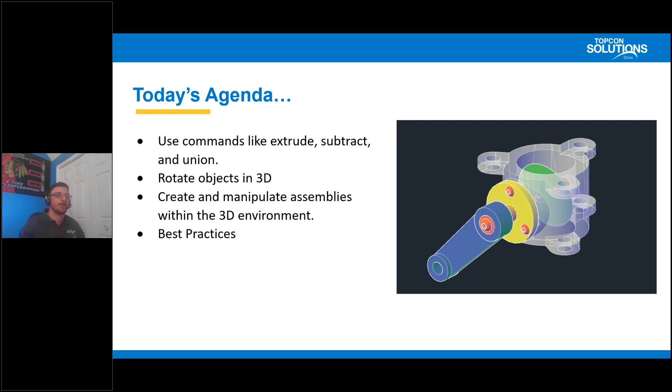With that being said, I'm going to go ahead and fire up AutoCAD 2022. You should be able to do all this stuff that I'm doing in 2020, 2021, even as far back as 2016 if you want to.

So the first thing that I'm going to do is take a look at what I have to deal with. It looks like I have 5 different parts when it comes to this butterfly valve.

The first thing I'm going to do is make sure that I have my 3D Tools tab visible and able to use. If you don't have that visible, all you have to do is right click, show tabs, and click your 3D Tools, and at that point it's going to bring that up.

You're going to see me navigating between this tab and my Views tab as I'm doing some 3D modeling and assembling this butterfly valve. So you definitely want to make sure that you have at least these 2 tabs available for you when you're doing this.

The first thing I normally do when I start modeling is keep the original line work and the dimensions intact. So I'm going to go ahead and copy everything over and put it someplace away from where all the original stuff's at.

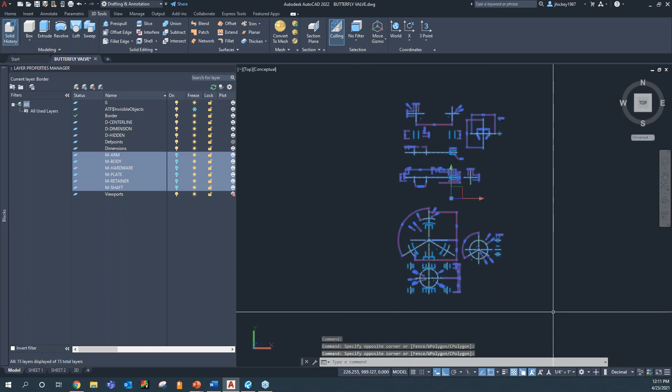The next thing is, when you're 3D modeling, you don't have to have the center lines or all the dimensions or anything like that, so I'm going to go ahead and delete all those. I'll shut off all the layers of the line work, come in and delete all that stuff, then turn everything back on. This way, all I have is my line work here.

We're going to tackle each thing one part at a time, starting with the simplest part up here. One thing when it comes to doing 3D models is you always want to make sure everything's made into a polyline. For example, this ellipse, this oval, is a polyline, so I'd be able to extrude that right off the bat. Other things like this line I'd have to make into a polyline, and when we get to that part I'll show you how.

So this first piece right here, I'm going to check the thickness of the side view because I need to know how far back I'm going to extrude it. Let me turn on my object snaps and check the dimension - it looks like it's 0.063.

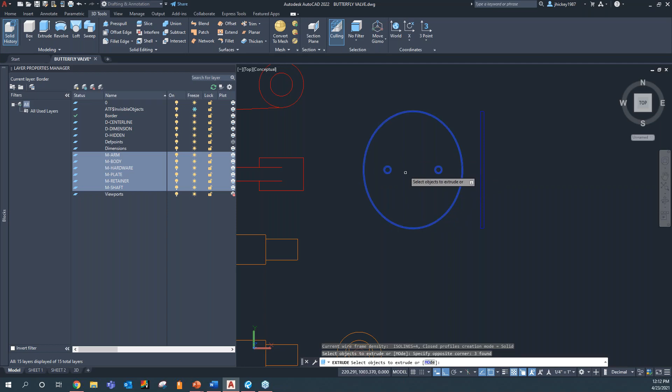So I'm going to come up to my 3D tools and select Extrude. I'm going to window and select all three entities right here, hit enter, and it's going to prompt me for how far back I want to extrude it - we're going to extrude it 0.063. Now you notice these holes are still filled in right here.

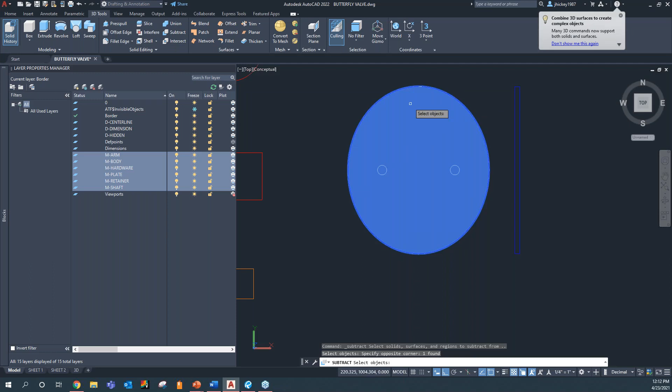What we have to do is subtract these two small cylinders from this overall piece. I'm going to select Subtract. The first thing I do is select the piece I want to keep, so I select this big piece and hit enter. Then I select the pieces I want to subtract from - these two small cylinders. The moment I hit enter, it subtracted the two holes out of that plate right there.

At this point we are actually finished with this piece, so I'm going to move it off to the side, get it out of the way and out of my work area. I'm going to delete the side view because I don't need it anymore.

The next piece, I'm going to go to the second most simplest one - this piece right here. It's going to be the same concept: I'm going to figure out what the thickness is, extrude everything, and then subtract all the holes out from the inside. So let's go into the distance command and measure this - it looks like it's 0.25.

So I'm going to come up and select Extrude, grab all the entities, and when it asks how far back, I'm going to type in 0.25. At this point I'm going to take my Subtract command, select the piece I want to keep, hit enter, and select the pieces I want to subtract, then hit enter again. At that point we've got this piece finished right here - I've got all the holes in there and it's at the proper thickness.

It's at the proper thickness. I'm going to move this off to the side too.

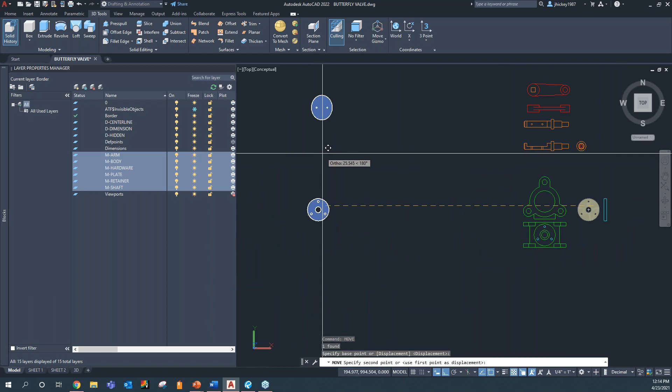Next I'm going to do this arm piece right here. This one's a little bit more complicated, but not too complicated. One thing I want to point out is these two circles, along with this, are already a polygon - a closed polygon. But these are just lines right here, so in order for me to extrude this area, I need to make that into a polygon.

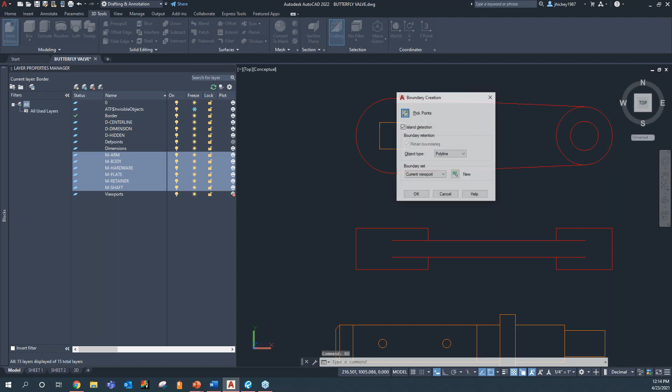The easiest way to do it is by the Boundary command. You can just type in BO, you see Boundary pops up there, and I'll go ahead and hit enter. You'll have this menu pop up - the boundary creation menu. All you have to do is go ahead and select the pick points.

And then you just pick a point inside this area and you're going to see it kind of highlight. As soon as you get that, go ahead and hit enter. And as you can see with the blue that popped up, it became a polyline or a polygon now. At this point, I can go ahead and start extruding all the parts.

So the first thing I'm going to double check is I'm going to go into the distance command. I'm going to see how thick this is, and it looks like it's 0.625. I'm going to check this side as well, and that is 0.625 as well.

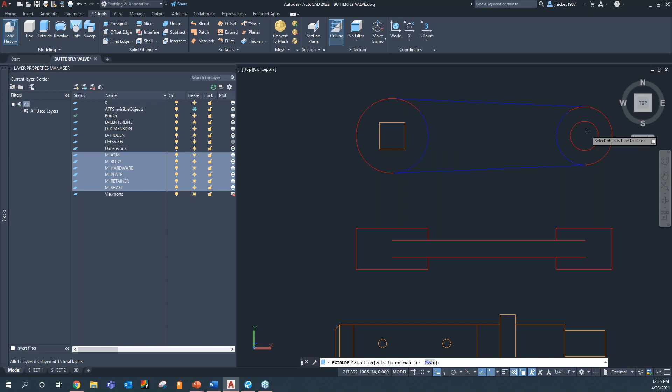So I'm going to go into the extrude command. And at this point, since both entities are going to be the same thickness, I can actually select both sides and extrude those at the same time since they're going to both be the same thickness. So we're just going to type in 0.625.

Going to come into my subtract command. I'm going to select the outer piece. I'm going to window and select the internal piece. I'm going to do the same thing over here. I'm just going to hit enter, go back into subtract, select that, hit enter, select that, and now I got those two pieces. The next thing that I need to do is extrude this thinner center piece.

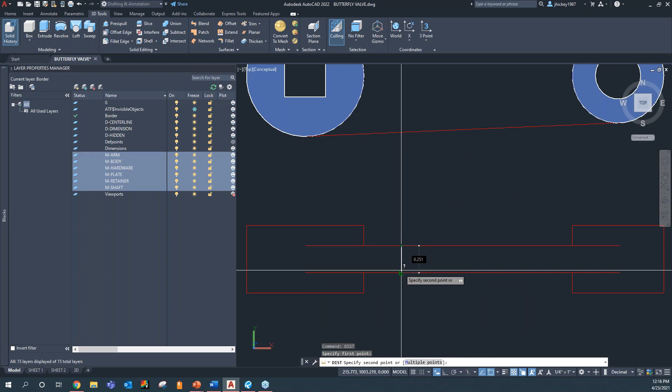So I'm just going to come down, do the distance command. I'm going to see how thick it is. It looks like it's 0.251. So I'm going to go ahead and come up to the extrude. I'm going to select that polyline. I'm going to do 0.251.

So the one thing to keep in mind is when you extrude, it automatically places everything at Z0. So if you notice, we have this gap right here. So I'm actually going to have to go into a different view and move that up. So the first thing I'm going to do before that, I'm going to type in distance. I'm going to see what that distance needs to be. And it looks like it's 0.187.

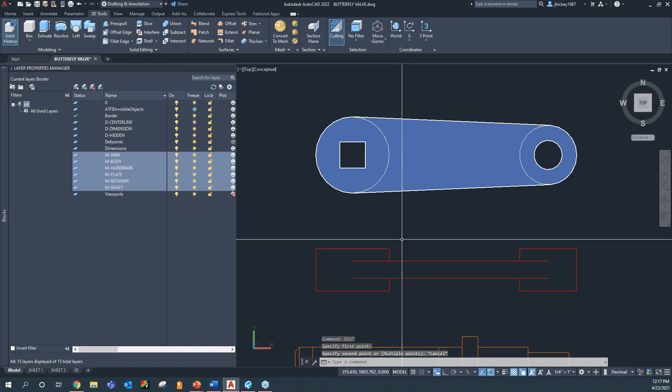I'm going to go ahead and use the orbit command. Think of it kind of like pan, but in the 3D realm. You can kind of just click, drag and drop and move around. You're going to be seeing me use that command as I'm kind of looking around and placing different things.

As you can see now, everything's at Z0, so I need to go ahead and move this up in the Z axis in order to get it centered. And remember, it's 0.187. One thing that I like to do when I'm trying to move things is turn on my ortho. So you can either hit F8 or touch the button down here.

And I'm going to go ahead and select this. I'm going to type in move. And then you're going to notice that I can take it straight up and down. If you wanted to, you could go in the X, you can go in the Y. I'm wanting to go in the Z axis. At this point, I'm going to move it up 0.187.

Now you can see that looks just like this side view right here. So the other thing that you're going to notice is when it comes to this piece, we technically have 3 different 3D entities that are part of this one part.

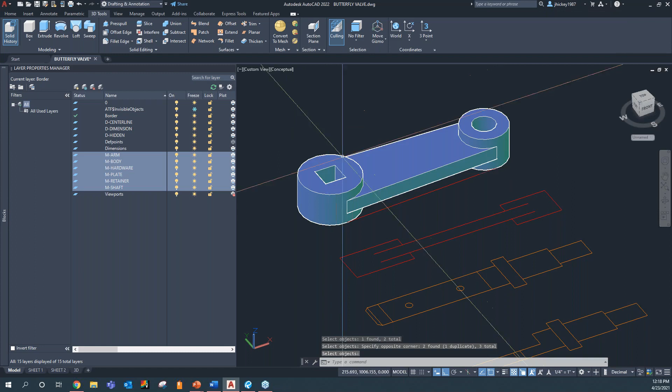Once everything looks good, you can go ahead and use the union command, which is right up here. Go ahead and select that, and then you just select the parts that you need. And once you have everything selected, you can hit enter. And now everything is one piece.

So at this point, we're done with this handle. I'm going to go ahead, just like with the other piece, move it off to the side. I'm going to actually move these further up, kind of out of the way.

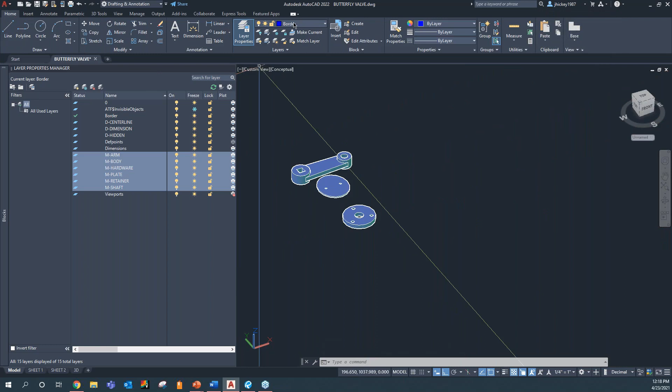So the other thing that I do want to point out is when you extrude, it automatically puts it in whatever layer you're on. That's why everything is blue. So I'm going to go ahead and put these on the proper layers now that I'm thinking about it. So that's going to be the retainer. This is going to be the plate. And that is going to be the arm.

So at this point, we're going to come back over here. Let's go to the view. I'm going to go to top view.

I'm going to go ahead and delete that section since we're done with that line work. Next, we're going to do this shaft right here. As you can tell, there's a couple different diameters, a flat spot, and a couple holes in it. Looks like this piece right here is actually a square piece with the hole going through it. So this one's going to be a little bit more complex than the other parts we've just done.

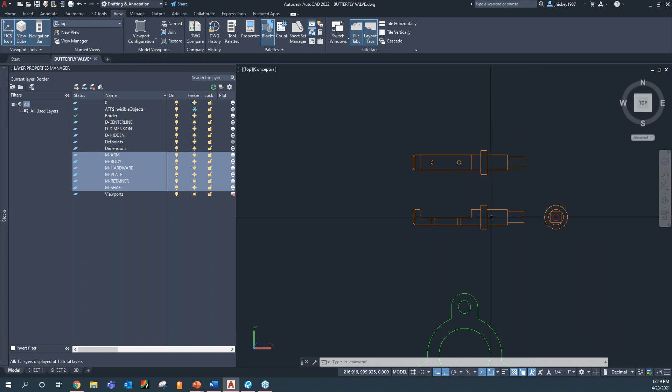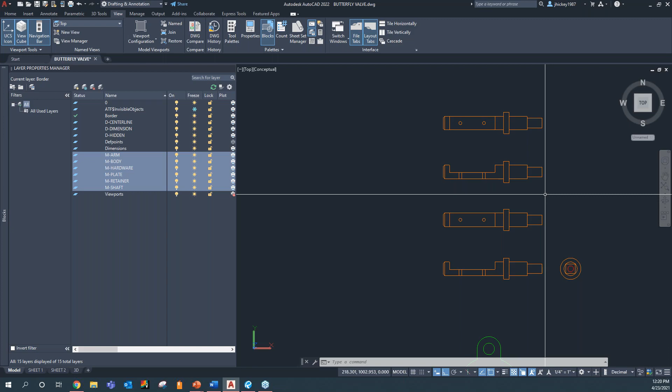It's not going to be a big deal to actually do it, and I'm going to walk you step by step through it. So this one, I'm going to make a copy and put it up just north of it. I like making multiple copies. I might not use every last copy that I have, but it's nice having multiple line works there, because after I finish one feature, if I need to go back and copy something different, I have it right there at my fingertips.

So the first thing I'm going to do is, I know that is a rectangle or a square, so I'm going to go ahead and delete that section. I know the rest of this is a round piece, so what I'm going to do is actually clean out the center right here. I'm going to clean out all the line work using the trim command. I'm going to trim everything out.

Next, I'm going to draw in a line from midpoint to midpoint, think of it kind of like the center line of that. And the ultimate goal I'm trying to do is get a nice clean profile of what this piece of bar is. Once I have that, I'm going to type in BO.

I'm going to select inside, and it doesn't matter which side you choose. I'm going to choose the top one, and hit enter. Sometimes you'll notice the line work's still there instead of the actual polyline. You can go ahead and select that and delete that stuff just to get it out of your way. And you can see that now I've got the closed polygon right there.

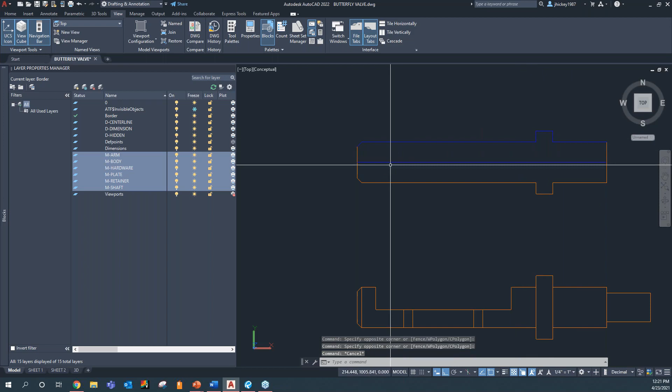So now that I have this profile view, I'm actually going to do the revolve command. The revolve command, I guess the best way to explain it, think of it like the mirror command but in a 3D realm. So I'm going to select revolve, select that profile, and hit enter.

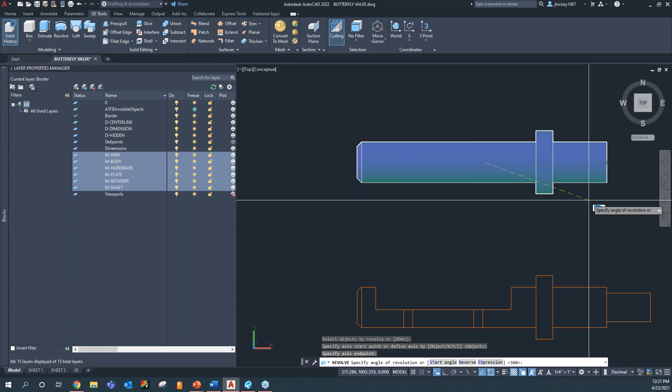Now at this point, I'm going to select the center axis that I want to revolve around. I'm going to select here to here. You're going to notice that it took that profile and revolved it around that axis. Now it's asking me at what degrees do I want, you could do a 90 degree, a 180 degree. In this particular instance, I want it to be a 360 degrees, so it defaults at 360. I'm just going to go ahead and hit enter.

And then if I go into the orbit command, you're going to see kind of what happened. It took that profile view on this side and revolved it around that center axis, at a 360. So now I have a perfectly round bar at the proper diameters. Let's go ahead and go back to the top view.

So the next thing I'm noticing is I have this notch that is knocked out of here. So what I'm going to do is actually make a 3D model of this rectangle and then go ahead and put it up here. I'm just going to type in the line command, close that, and do the boundary. I'm going to select inside here.

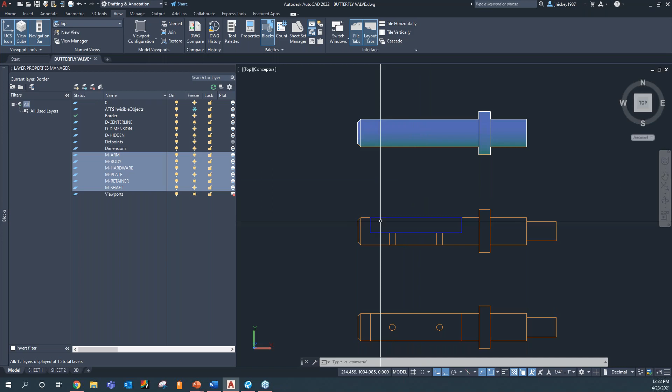Then at this point, I'm going to go ahead and extrude. Since all I'm doing is cutting it out, all I want to make sure is that however far back I extrude this is the same or a longer length than the thickness of this bar, and you'll see why here in a minute. Let's go to extrude, I'm going to grab that, and let's just choose 3 inches. So there we go. At this point, now I need to go ahead and move this up to this bar.

So I'm going to choose the orbit command.

I'm going to get it in a view that I can see. Usually when I'm messing around with multiple different 3D objects, I like to change the color of them just to make it easier to distinguish between the parts. So let's go ahead and make this red.

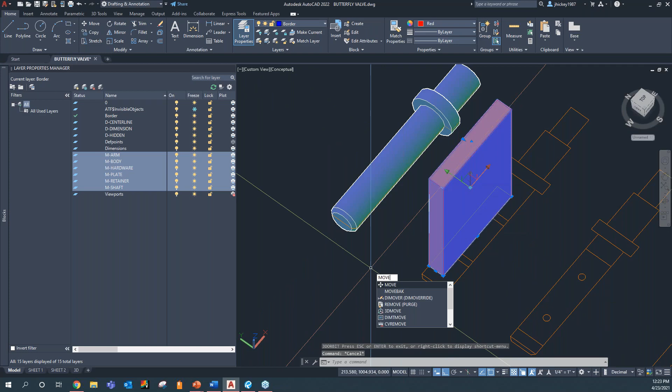At this point, I'm going to move this. I'll reference the midpoint right here and move it to the midpoint right there, where you can see the line work from the previous view. When I take a look at it, it's there, but I also need to move it down in the Z so it goes all the way through.

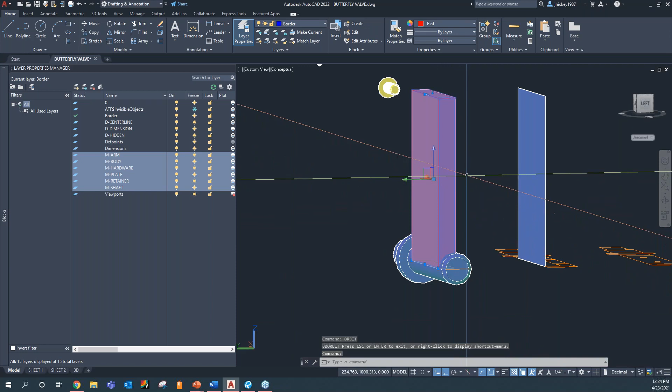I'm going to do the move command again and move it straight down. Now that it's going all the way through the part, I'm going to subtract this bar out of the shaft to get that nice notch in there. Let's go ahead and delete that out of the way.

I'm going to come to the 3D tools and select subtract. I'll select the bar, hit enter, then select this. Now you can see I have my notch in there.

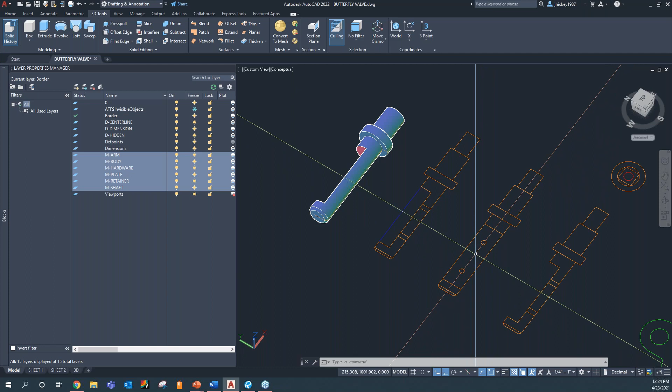Next, I need to rotate this so the flat is facing up at me like in this view, so I can go ahead and punch those holes out. Let's go to the view, and I'll go to the right view.

I'm going to come over here, and you can see the bar right here. I'll select it and use the standard rotate command, rotating it 90 degrees. When I come up here and move it around, you can see it rotated 90 degrees, so now I can match this view right here.

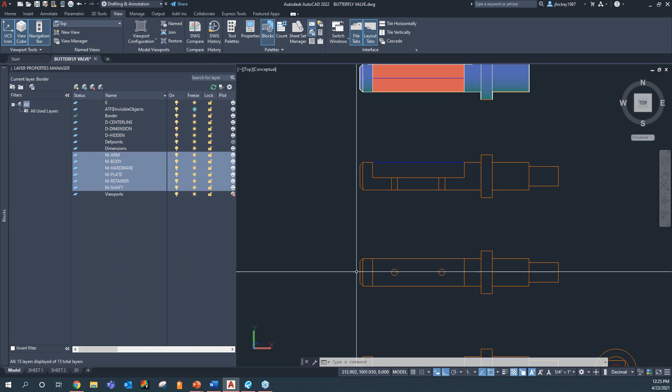Let's come back to the top view so it's nice and square and I can see everything. At this point, much like before, I'm going to extrude these at 3 inches as well, then use the midpoint from here to the midpoint here to place it. Then I'll do a move command so it goes all the way through, followed by the subtract command to get those holes punched in.

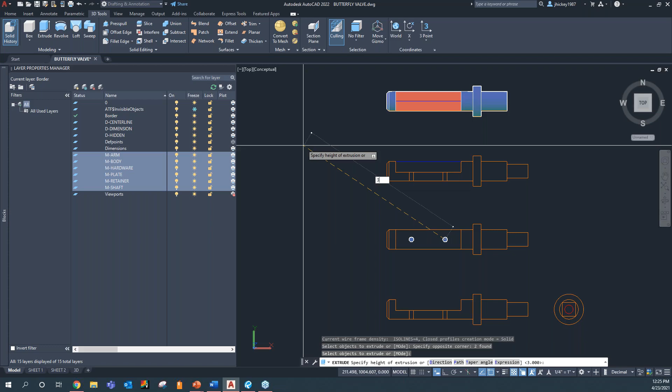Let's come up to the 3D tools, the extrude command. I'm going to select both of these. It's going to ask me for a distance, and I'll type in 3. I'll use the orbit to kick off into an ISO view.

I'm just going to go ahead and move these. Much like the other piece, we're going from midpoint to midpoint. I can show you right here how it's not going all the way through the part, so we're going to do the move command and move these down in the Z. There's no specified distance, you just want to make sure it's going all the way through.

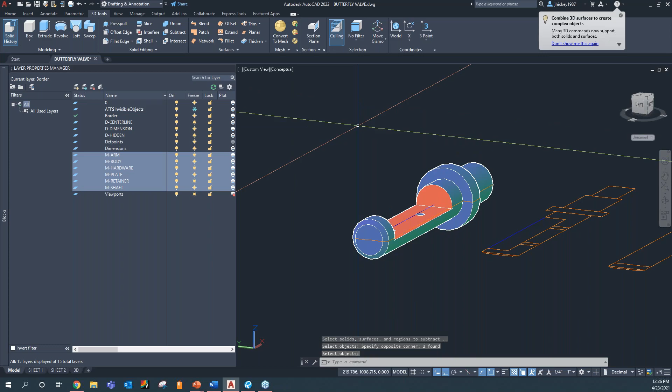As soon as I have that done, I'm going to come up to the subtract command. I'll select the bar, hit enter, select those, and now I've got my holes punched in there, as you can see.

The last piece that we have is this square piece with the hole punched through it. I'm going to go ahead and do that piece now. Let's come to the top view.

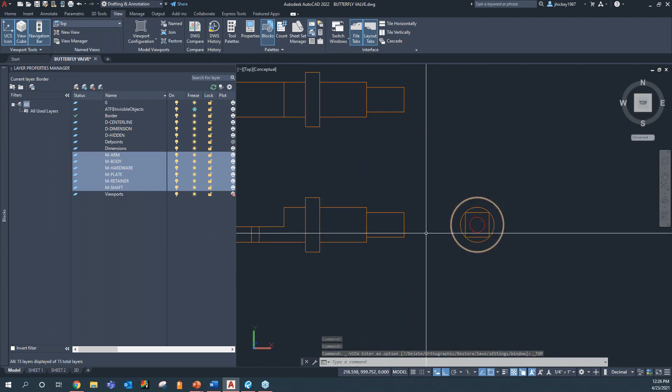At this point, I know this is a square. There's a hole that's going to be punched through it. All I need to know at this point is how far back it goes. So right now it's at 0.625.

I'm going to double check and make sure that's a closed polygon, and I know the circle is. We're going to come back and do extrude. I'm going to grab both of them and go back 0.625.

I'm going to go ahead and use the subtract command. I'm going to grab the square, hit enter, window, and grab the circle. And now I got that hole punched in there.

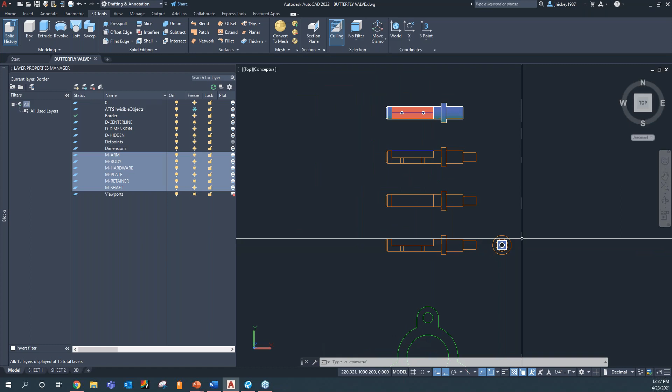The last thing I need to do is rotate this 90 degrees, and I'm going to place it here. So in order to rotate it, I want to look at it from the front view, which is coming from the south if you want to look at it that way. I'm going to go to view, come to the front view.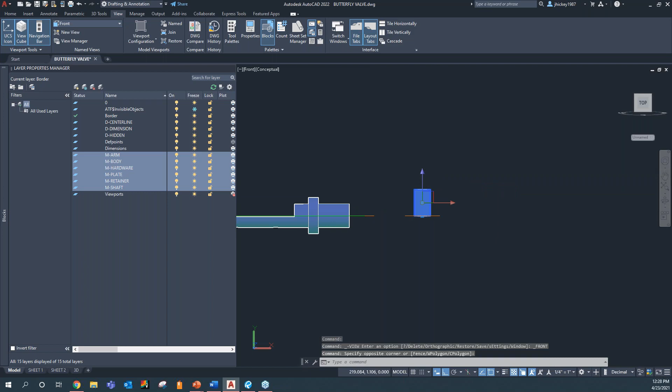At this point, I'm going to type in the rotate command. It's your standard rotate, and I'm just going to rotate it 90 degrees.

At this point, I'm just going to come into orbit and kind of kick it off in that ISO view. You can change your different views up here - you have conceptual, hidden, realistic, and so on and so forth.

I want to be able to see that center of that hole on this backside. I'm going to place it right there at the midpoint or the center of that hole or circle. So I'm going to come up here, click it down, go to 2D wireframe. And you can still see the profile line work.

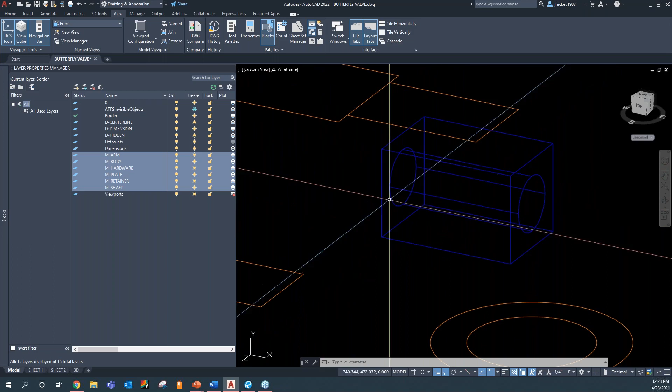So I'm either going to be snapping at the midpoint or at the center of this circle. It all depends on whichever snap pops up. But now you can actually see that circle on the backside.

So I'm going to go ahead and grab it, type in move. I'm going to grab the center snap right here. At this point, I'm going to snap it right there.

And then I'm going to come back to the conceptual view. I like the way it looks. You could technically, if you want to, grab realistic, shaded with edges, however, whichever one you prefer. I like conceptual myself.

So at that point, I'm going to do an orbit, kind of inspect the part, make sure everything looks good. Everything's looking good there. Got my holes, got my area kind of cut out there.

Once everything looks good, it's like the other part. We have two separate 3D entities. I'm going to go ahead and union those.

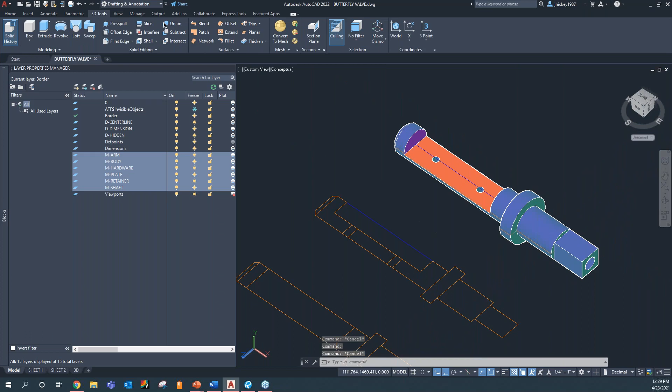One thing to keep in mind that I didn't mention before is when you union 3D parts, it's not like doing a join as a polyline or anything like that. If you union these parts, you can't explode it and separate it into these two parts again. So it is always crucial to do a nice, good, thorough look over before you union, because once you do it, there is no going back without actually hitting the back button. That's the only way. So I'm going to go ahead and union these.

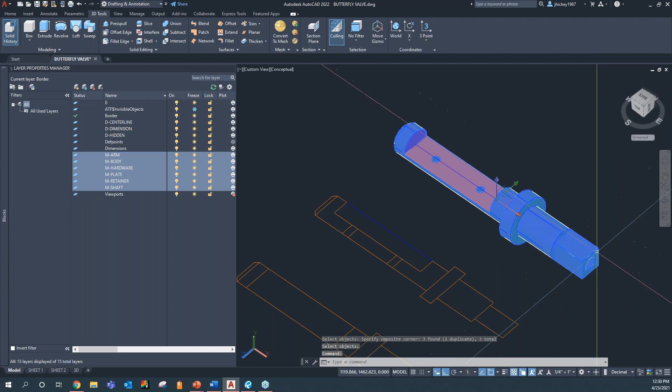And as you can see right now everything is one part. I'm going to go ahead and we're going to throw this on its layer now. That is going to be the shaft. You're going to notice that you still have the red there.

And the reason that was is when I subtracted it, it took the red that I made that color and placed it there. If you want to fix that, go ahead and select it, just change the color to one color and then change it back to by layer. And you're going to notice that now everything's fixed.

At this point, I'm going to go ahead and move this off to the side as well. There we go. I'm going to come back to the top view. I'm going to go ahead and delete all that line work. I am done with the shaft. Everything's good to go. I'm going to go ahead and move this a little bit further out.

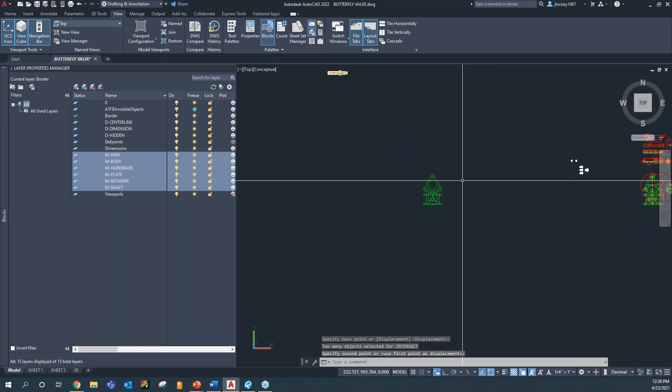There we go. So the last piece that I have right here is the body. There's a lot going on with this body. It is rather complex, but it's nothing to get too worked up about. You always have to kind of tackle these things one step at a time, and you just have to think of that mentality. So the first step that I'm going to do is I notice that I have this body right here that's going the full length.

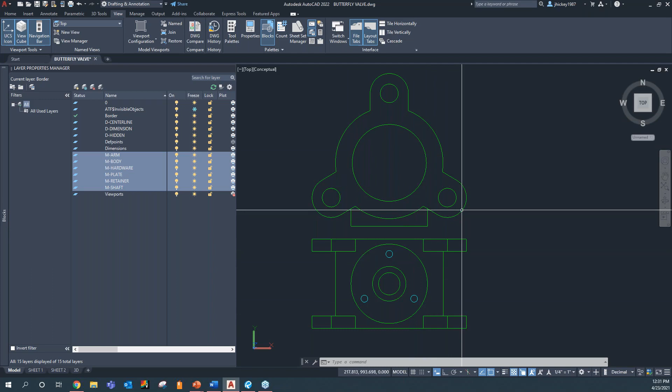I notice these flanges have one set on top and one set on bottom, so I'm going to do those first. I'll make another set of copies like we did with the shaft, moving it over 6 inches. That way if I mess something up, I can copy it back over here. The first thing I'm going to do is draw a circle.

We're going to make that circle enclosed. At this point I'm going to do the distance command to see how far it needs to go. So 2.25 is what I need.

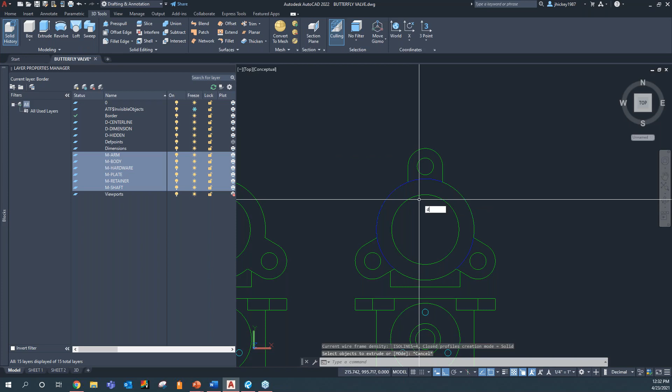Now I'll come up to my 3D tools and extrude. Let me double check that distance - 2.25. So let's go ahead and extrude this 2.25. Like with the other parts, I'm going to have to use my subtract command.

I'm going to select subtract, grab this outside circle, hit enter, grab the inside, and now we have the body there.

The next thing I'm going to do is the flanges. I'm going to use the boundary command and pick my points - selecting here, here, and here, so I can get those flanges in there.

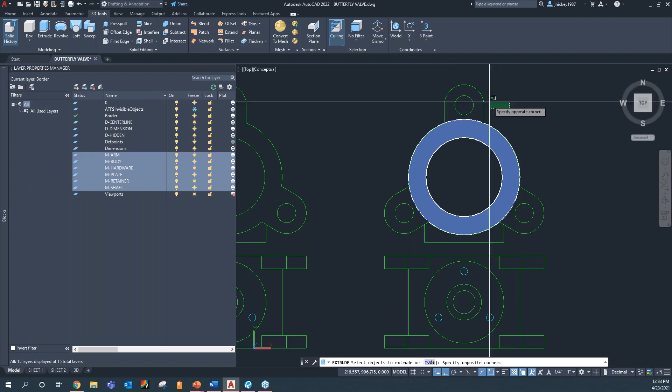I'm going to check the distance - 0.313. So now I'll extrude the flanges 0.313. I'll grab extrude, window select, select, select, 0.313. Then like with this hole here, I'm going to subtract these center holes.

So let's come up here, subtract, subtract. Let me see - there we go.

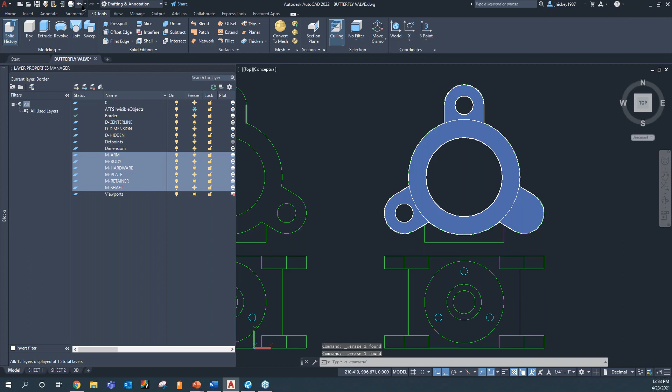I think that one actually had a couple of extra circles in there. If at any time you have several circles on top of each other, when you extrude, sometimes you might get 3 or 4 solids in there. So it's good practice to do an overkill check. I deleted 2 internal circles already, there's 1 left, so I should be able to subtract from here and select it, and it should punch that hole now. There you go.

So the next thing is we're going to pop off into orbit and take a look. Like with the other pieces, when you extrude, it puts everything at Z0, so I want to copy these flanges up and get them lined up with this top lip. As you can see in this view, you have 2 sets of flanges here.

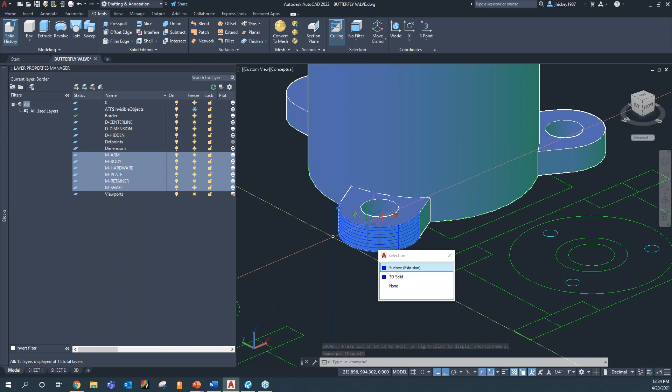I'm just going to come here and select these. One thing I want to point out - you see this right here? That's actually a surface. What happened is I accidentally grabbed a line and extruded it along with everything else. If you ever see these, just go ahead and delete it, you don't need it there. There's another one.

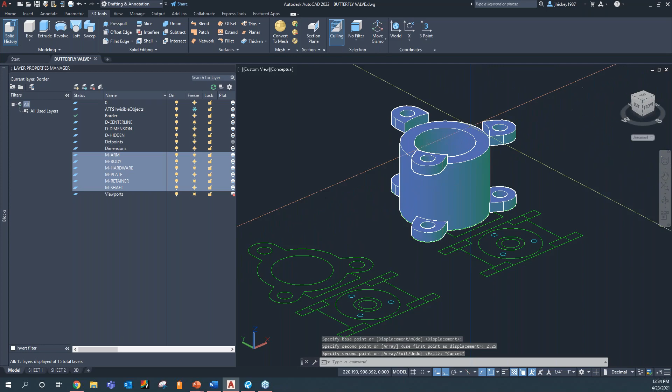I'm going to grab all 3 flanges and do the copy command. I'll copy it up 2.25. You'll notice it's a fuzz too far, but it's easier for me to do the math in my head by copying it up the length of this body, and then we'll move it down the thickness of those flanges, which is 0.313.

So now we have the main body done. Now we have this piece right here on the front that's actually going to attach to this face. For right now, just so I can make all these pieces one, I'm going to use the union command and go ahead and union stuff now, so I don't have to worry about having multiple pieces out there.

There we go. So let's go ahead and do this front part of the body now. I'm going to come back to the top view.

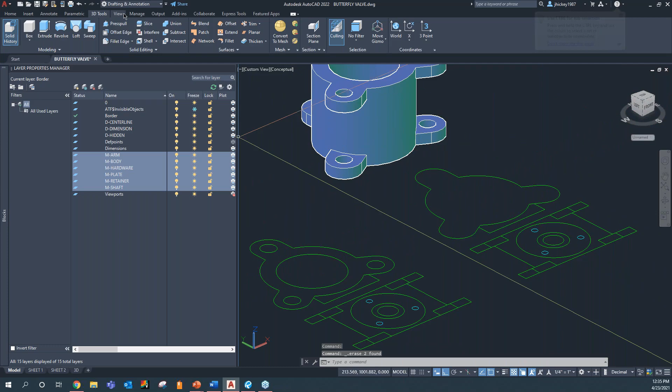So I'm going to go over here. I'm actually going to end up copying this view back over here because some of the hidden lines and stuff, we're actually going to be using that for some information. So we're just going to go ahead and copy that there. At this point, I'm going to clean up the dimensions in the center line because we still don't need those, but I do need the hidden lines though.

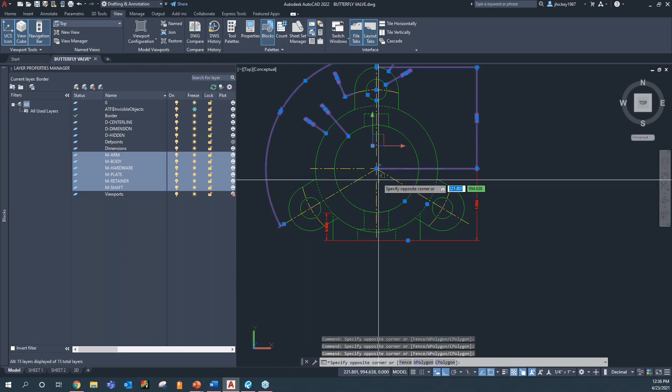So one thing that I do want to point out is we do have this cylinder. It's going to be coming in and actually being on that face, but you also have these 2 circles here. One's a countersink that's coming in, and the other one's actually going to be shooting all the way through and partially into the other side of the wall. So that's why we wanted the hidden lines.

So the first thing that I'm going to do is I'm actually going to figure out how far back I need this outside circle to be, and it looks like 0.606.

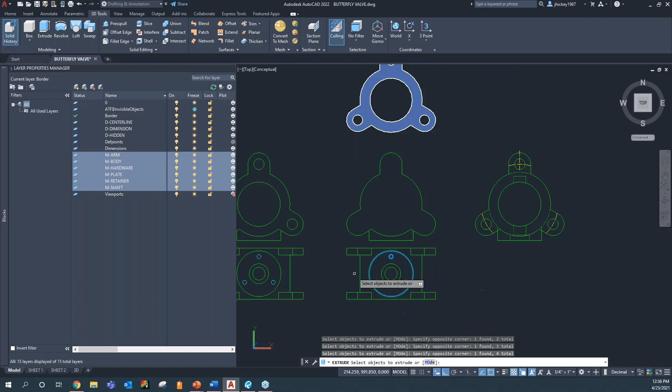So I'm going to go ahead and I'm going to do an extrusion. I'm going to grab that circle and also these screw holes. I'm going to extrude those 0.606. And you're going to notice that now I can't see those things right there. It's not a big deal.

We're going to go ahead and subtract those screw holes, and I'm going to move it off to the side. That's the way so I can focus on the internal stuff now. So let's go ahead and subtract those. I'm going to grab that. We're going to go ahead and just move it off to the side, and I'm just going to move it 3 inches. I know the distance. That's the way so when I extrude these, I can just throw those off there, and I know everything's going to be lined up.

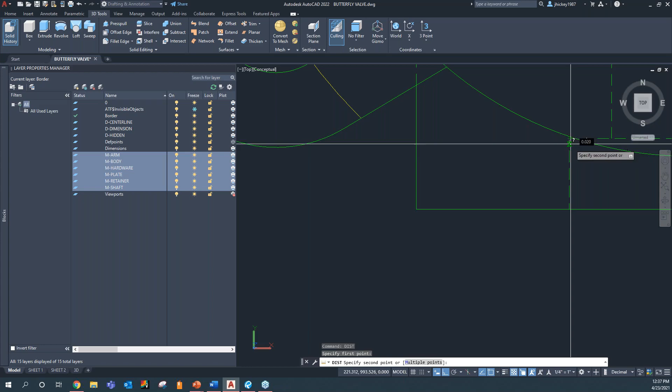This outside circle, which is your countersink, I'm going to go ahead and extrude that now. So I'm going to figure out how far I need to go. And it looks like 0.25. I'm going to go ahead and do the extrude, 0.25. Going to go ahead and move that over 3 inches just to get it out of the way.

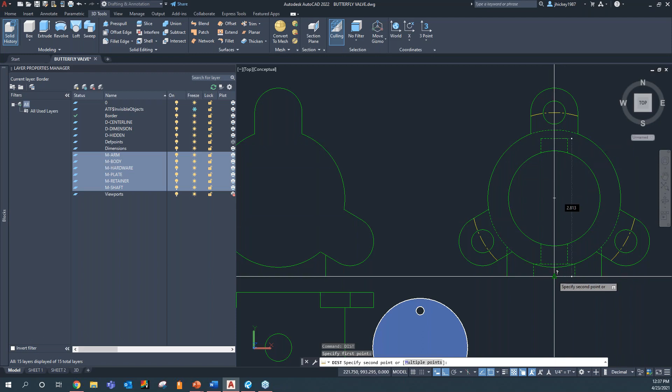The next one is going to end up extruding, and I'm going to go 2.813. So let's go to extrude, 2.813. I'm going to move that over 3 inches just so I know where it's at.

So at this point, you can take a look. I got my countersink. I got this piece right here. I also got the further one that goes further back. One thing you'll notice is I'm going to have to rotate it a negative 90 degrees so I can place it right here on the face.

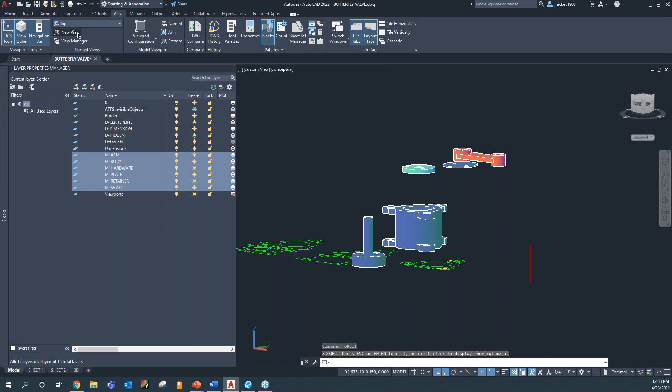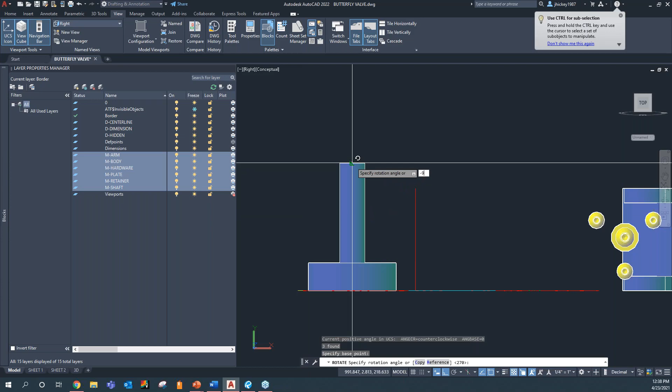So what I'm going to do is I'm actually going to come to the right-hand view. So if you're kind of wondering how I'm figuring out what views I need to go to, I need to look at it from the right-hand side, looking this way. So I'm going to come to the right-hand view. And as you can see right there, at this point, I'm going to make sure I select everything. I'm going to do the rotate command. And I'm actually going to rotate a negative 90 degrees. That's the way so I got everything orientated how I need to.

It should look just like that. So the best way for me to actually place this properly on this face right here is I'm actually going to use the center of this shaft. I'm going to draw a construction line on this face.

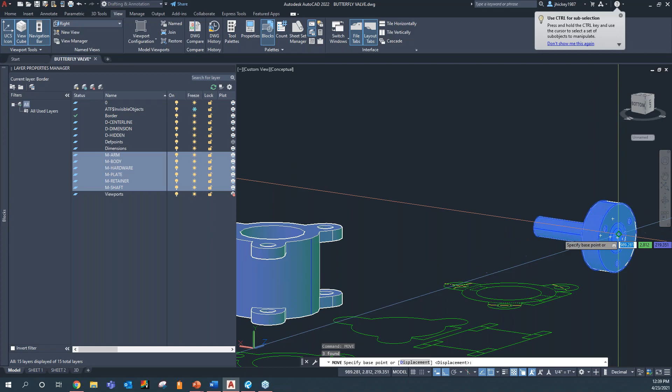So I just went into the line command. I'm going to select the midpoint here to the midpoint there, and then I can actually use the midpoint of this line for the center of this circle. So let's go ahead and grab everything. I'm going to type move. I'm going to grab the center. I'm just going to go ahead and use the midpoint like that. And at that point, you can actually delete that line right there.

Last but not least, you're going to notice that doesn't quite look like this view right here. And it's not a big deal. We're just going to go ahead and use the move command. So I'm just going to go ahead and select everything. I'm going to type in move. I'm just going to come over here and I'm just going to reference this right here, just like that.

Go ahead and kick it off into an ortho view. So the last thing I'm going to do is union this with the body, and then I'm going to subtract those two internal pieces.

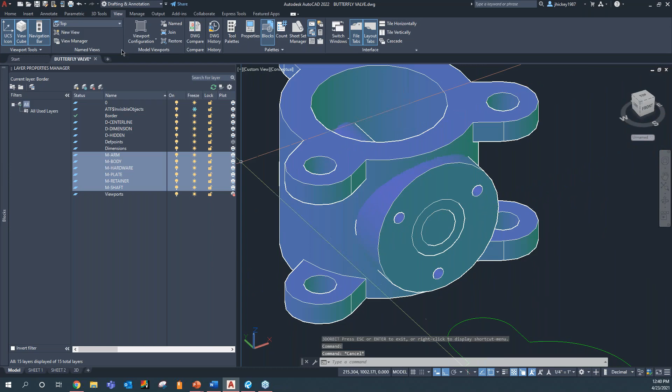So let's come up to 3D tools, union. I'm going to select the body and this outside piece. There we go. And then last but not least, I'm going to select subtract. I'm going to grab the body, and window to grab those two shafts.

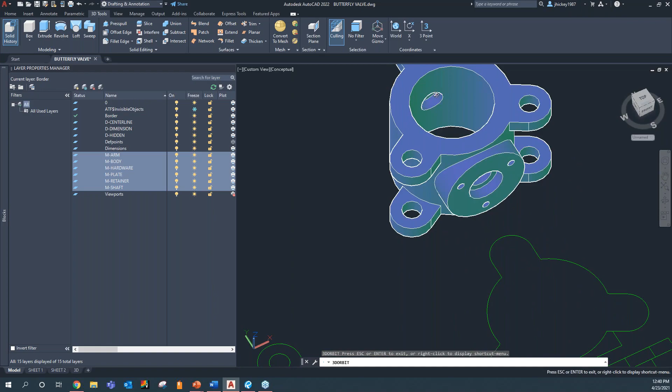And now you can actually see we got the countersink in there. It kind of goes through on the other side. You can kind of see right there.

At this point, we've got all the pieces we need. We're going to go ahead and start assembling this. So I'm going to come back to the top view, put this on its proper layer, the body layer, and move it up here. Now let's start going through and assembling everything right here.

So when we're assembling it, we have this plate that is going to attach here. That shaft is going to go in here. You have this retainer ring right here that's going to bolt right there. And then of course you have this handle that's going to fit right here.

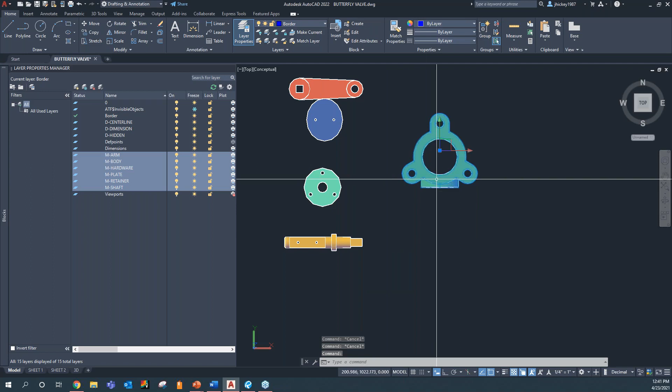So what you're going to see me do is I'm going to be going through and using rotate a lot, jumping into different views so I can manipulate everything and get it in the right orientation it needs to be. The first thing I'm going to do is rotate this body 90 degrees. So let's go ahead and do that.

The next piece I'm going to do is go into an orbit and kind of do an ortho. I'm going to go ahead and put this plate right here on this piece right here. And the easiest way to do it is to go ahead and reference these holes.

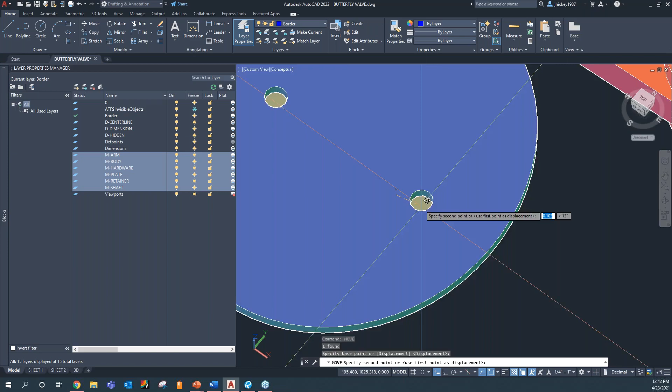So I'm going to grab the center, and you're going to notice two different center ticks. The one on top is for this top circle, and I want the one on the bottom. I'm going to reference this center right here and place it right there.

So you're probably wondering, is there a way to actually bring in some type of hardware or anything like that? There's actually a neat little tool. McMaster-Carr has been doing this for a long time, and a lot of people don't know about it. So if you jump onto McMaster.com, go ahead and write this down, McMaster.com. You're going to notice that they have a lot of different hardware and stuff here.

So for example, say if you wanted a bolt, you can go ahead and select screws and bolts, figure out what kind of bolt that you want. Say if it's a socket head screw, figure out which type of socket head screw you want. Let's just stick with this one, you've got your different types of material for that socket head screw. Let's just go ahead and select the first one. You're going to notice it pops up, and they give you every size you can think of as far as the lengths and everything like that.

So after you end up figuring out, say if you wanted something a little bit bigger, like a 12-24, and you want it to be 1 1/4 inches, say if that's the one you want, you're going to notice the part number over here. Go ahead and click that, then you're going to see product details. And if you click that, it brings you to this screen.

So let's go ahead, and I'm going to download it. And then what it does, it downloads into your download folder and stuff. And then if you want to bring it into your CAD file, all you have to do is go to the top view and type in import.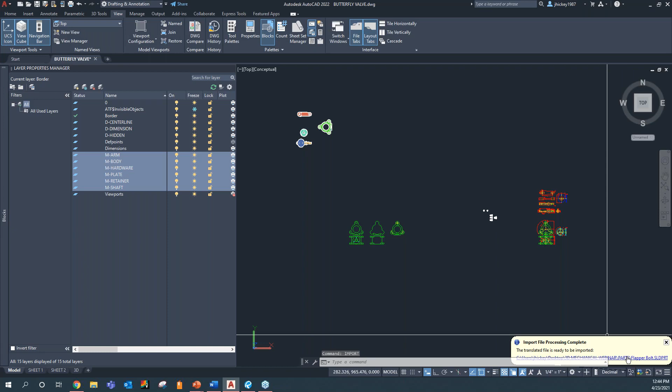This isn't the same bolts I just got done downloading. This is some other ones I've done, but it's the same concept. If I select this, you'll see this pop up, click close, and a window pops up. The moment you click this link, it imports that part, right here at the origin. If I zoom in, right there is that bolt.

So definitely use McMaster-Carr, and all it is the import function when it comes to AutoCAD to bring that SolidWorks part into AutoCAD. You don't have to worry about modeling the screws or anything, and everything's 100% to spec.

With that being said, I'm going to delete this one. I already imported the hardware that I needed. So let's come up to the top view. The first piece of hardware I need is these two screws, and like I said, I already have them put in there. I have those screws right there. Let's come up to the top view.

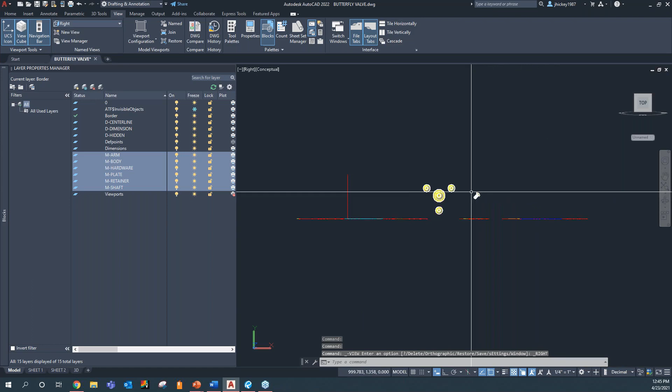Actually, I have those at a 45 degree angle, so I'm going to rotate those. Let's come to the right-hand view. There we go, let's find those screws. So those are at a 45. I'm going to rotate those 45 degrees.

At this point, I'm going to place those where they need to go. We're going to grab both of them. I already had them spaced and placed, so I don't have to worry about doing that. Normally you would just take one, copy it, and move it over. So I'm going to reference the center mark, and make everything, or the only one, for my snaps at center.

Let's grab right there, and at that point I'm going to come up here. I'm just going to snap it to the center marks right there. There we go, so now I have that piece assembled. I'm going to go ahead and put the handle on.

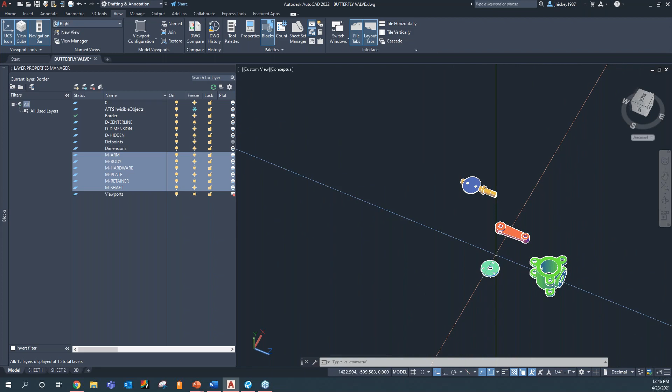So the handle, I'm going to have to come into the front view, look this way, and rotate it 90 degrees. Let's come to the front view. Going to grab it, rotate, and we're going to do a -90, just like that. Going to orbit so I can kind of see what I'm doing. And as you notice, you got that square, so you can just slide it on.

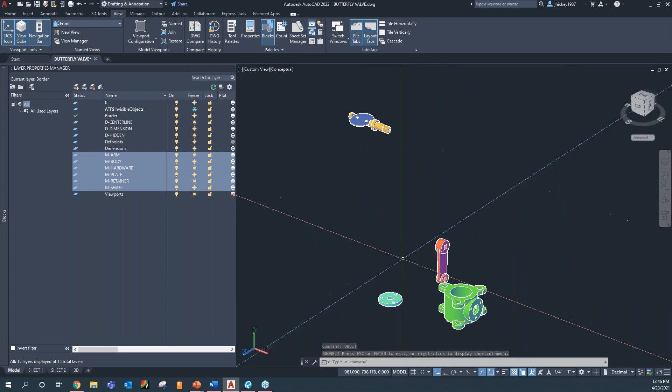I'm actually going to have to turn on my object snaps again, let's turn them all on. I'm going to come over here, type in move. I'm going to grab that midpoint, and snap it to this midpoint, which I'm kind of guessing right here. If you want to do like we did last time and actually go into the 2D wireframe, you can do that as well. But I end up getting lucky, I snapped it right. So now we have that part on there.

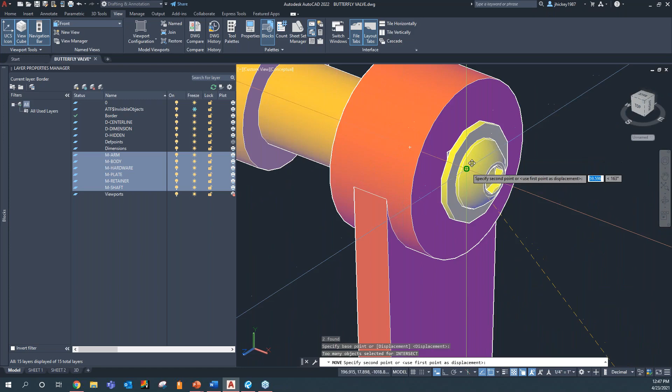I do have another piece of hardware, I got this bolt and that washer there. So I'm going to just move that using these center snaps. Come here, got that center snap right there. I'm just going to snap it to the center right here. And now we have that piece of hardware there.

At this point, I'm ready to actually insert this into this hole right here. But the one thing I already know just by designing this, I actually have to kick this at a 45-degree angle. So let's come to the right-hand side.

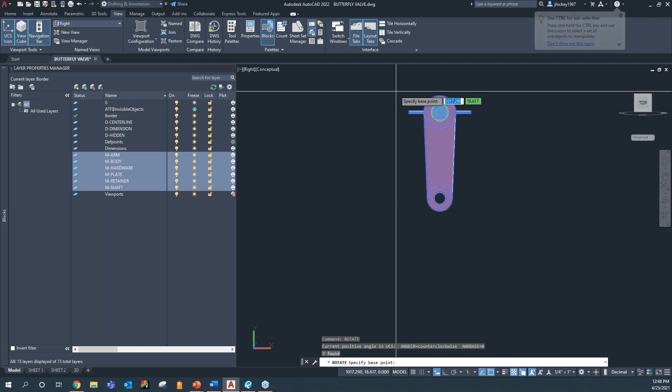I'm going to go ahead and grab everything, then do a rotate. I'm going to rotate it -45 this way, so it's like that. Then at that point, I can go ahead and slide that into the body.

At this point, I can just grab it and type in move. I'm going to reference this center mark right here, place it, and reference this center mark right there. So at that point, when you rotate around, you can start seeing how it's coming together.

The last thing I need to do is put this and slap it right here along with putting the bolts in. Then we'll be wrapping up as far as the 3D model of this.

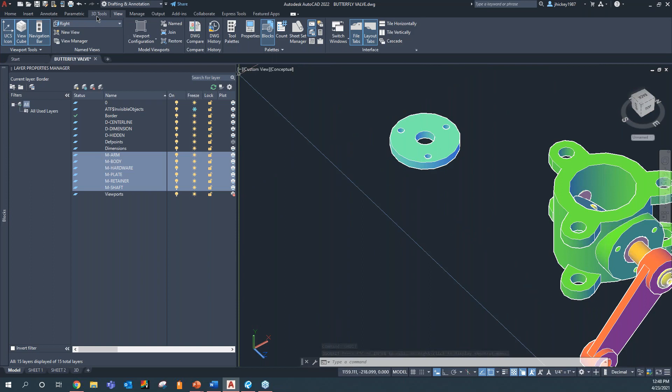So the first thing I'm going to do is come to the top view and take a look. I'm going to notice the orientation of this also has to line up with the circles right here, so I need to pay attention going through this and make sure I rotate it in the proper direction.

So let's see, what would be the best way? Let's come to the right side view. The reason I'm choosing the right side is I noticed that one hole is directly down at the bottom right here, so I'm actually going to rotate it to the right up 90 degrees.

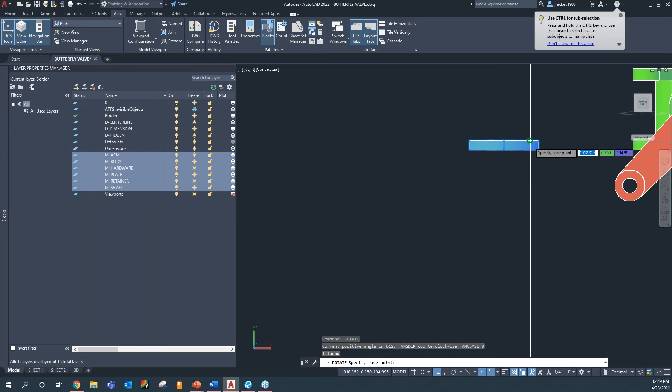So let's come up to the right. I'm going to rotate and do a -90. Then at that point, you're going to see why I did it that way. I got this hole right down here along with this one right here.

At this time, I can come to the top view, rotate it 90 degrees, and then place it onto the 3D model. So let's come to the top view.

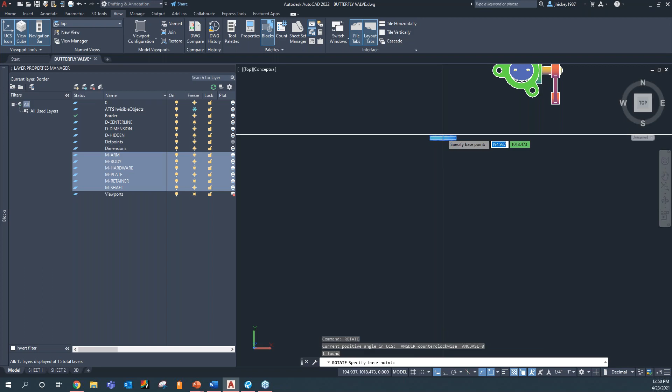At this point, I can rotate it either -90 or +90, it doesn't matter, so let's do a -90. I'm going to go ahead and orbit again, kind of go into ortho. Then at that point, I can reference - let's go into a 2D wireframe.

I can reference the center snap of this circle to the center snap of this one. That's going to place it in there how I need it. Let's go ahead and come here, I'm going to type in move. I'm going to snap from that center mark to this center mark. And then at this point, we can come back and do the conceptual view.

I can see that everything fits there. You can see the holes all the way through.

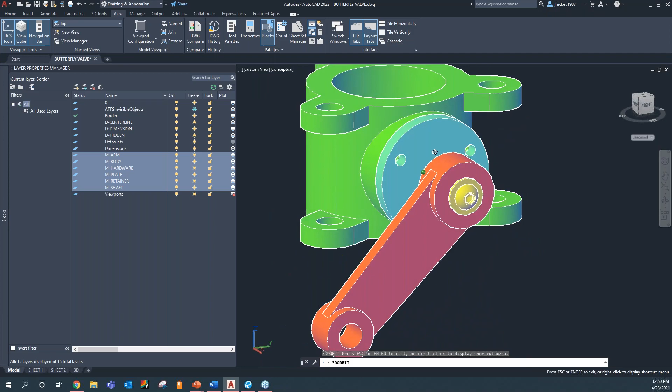Last thing I need to do is put these three bolts right into where they need to go, which I already have oriented. Normally you wouldn't have that - you would end up just copying one and snapping it on all three circles. But since I already have them oriented correctly, I'm just going to go ahead and move.

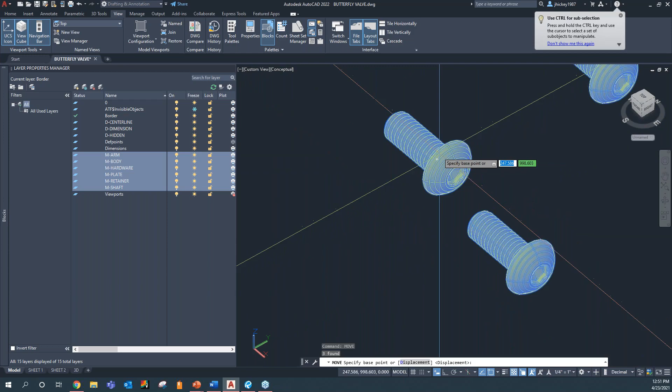At this point, I'm going to grab that center right there. And there we go - at this point, you actually have a completed 3D model.

Everything looks good. If you want to do a nice transparent view, come over to your layer properties - we can come into the body and use the transparency, which of course my transparency is way off into the right field. So if I do a 50% transparency, let's go ahead and close that out.

Now you can kind of see through the body and see all the pieces and where they go, along with the shaft and stuff.

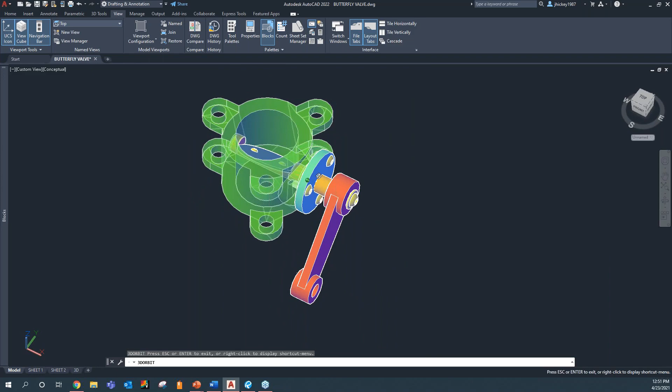So that being said, this actually concludes doing the 3D model of a butterfly valve. So if anyone has any questions, feel free to go ahead and ask them. If you've asked them in the text chat, go ahead and we'll start answering those.

All right, Josh. Well, it appears that we do not have any questions at this time.